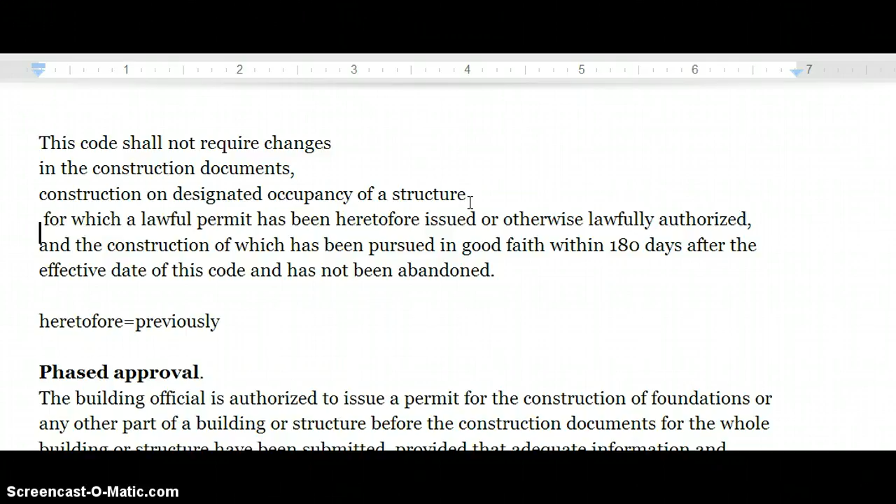This code shall not require changes in the construction documents or construction on a designated occupancy of a structure for which a lawful permit has been issued or otherwise lawfully authorized, and the construction of which has been pursued or started in good faith within 180 days after the effective date of this code.

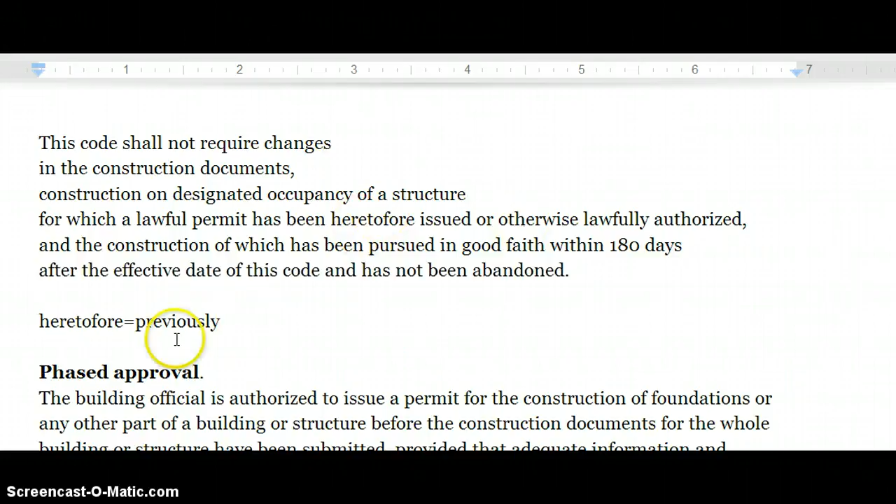Phased approval. The building official is authorized to issue a permit for the construction of foundations or any other part of a building or structure before the construction documents for the whole building or structure have been submitted, provided that adequate information and detailed statements have been filed complying with pertinent requirements of this code.

That means paperwork can be submitted at different times during a large project.

The holder of such permit for the foundation or other parts of the structure shall proceed at the holder's own risk with the building operation.

And without assurance that a permit for the entire structure will be granted. So there is a risk for doing this. You may run into a problem at a later phase of the project, and that is possible.

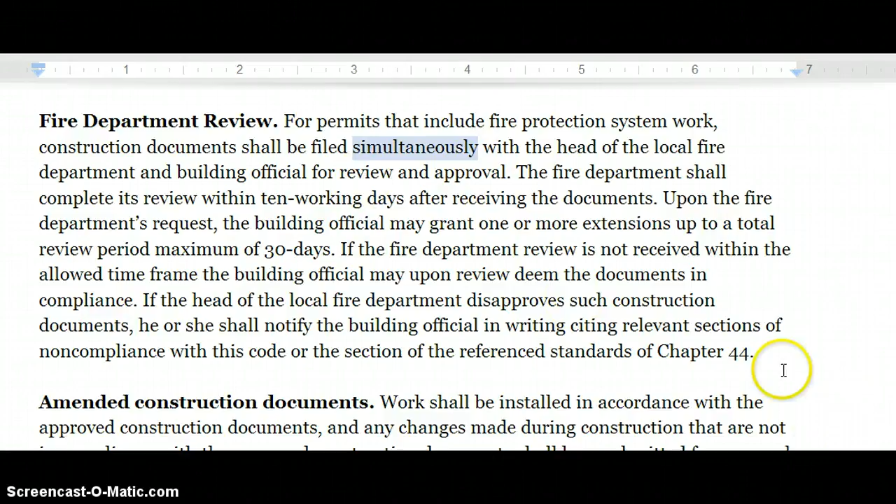First, fire department review. For permits that include fire protection system work, construction documents shall be filed simultaneously - that means at the same time - with the head of the local fire department and building official for review and approval. The fire department shall complete its review within 10 working days.

So this could be a test question. May or may not be.

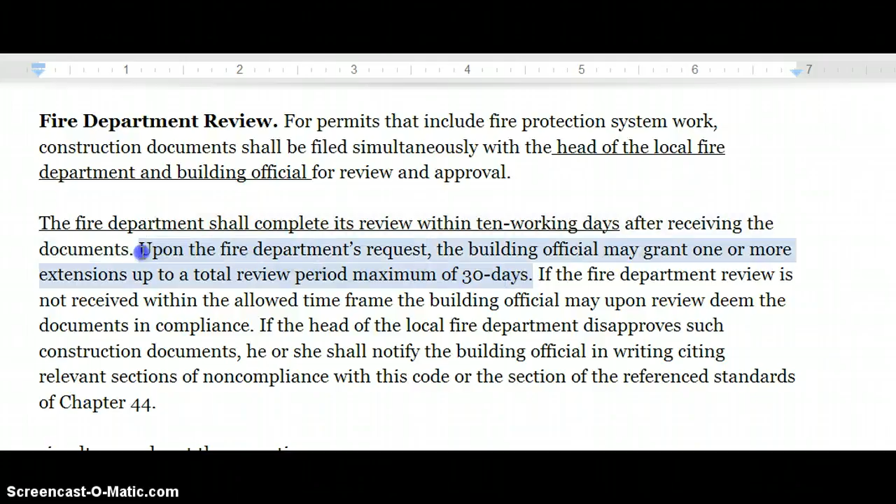After receiving the documents, upon the fire department's request, the building official may grant one or more extensions up to a total review period of maximum 30 days. So the building official can give the fire department an extension for their review that goes from 10 to 30 days.

If the fire department review is not received within the allowed time frame, the building official may, upon review, deem the documents in compliance. So sometimes the fire department just stays quiet and then the building official just approves the permit.

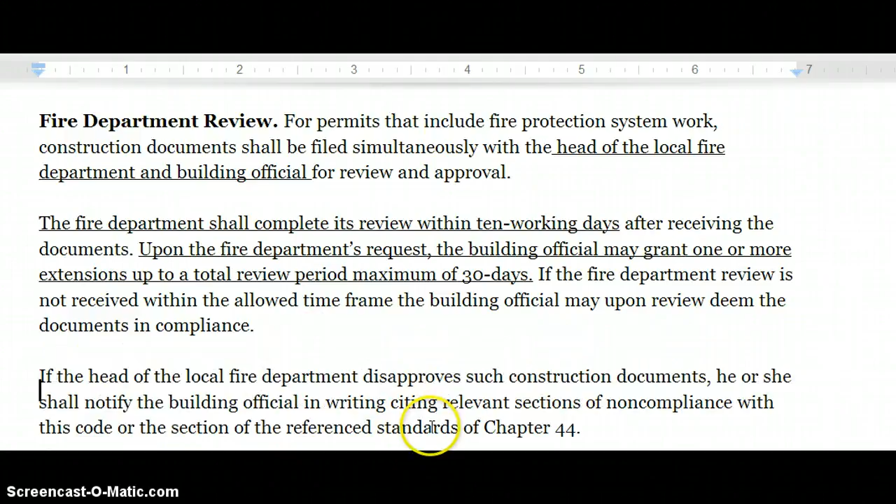If the head of the fire department disapproves such construction documents, he or she must notify the building official in writing, relevant citing - that means pointing out relevant sections of the non-compliance with this code.

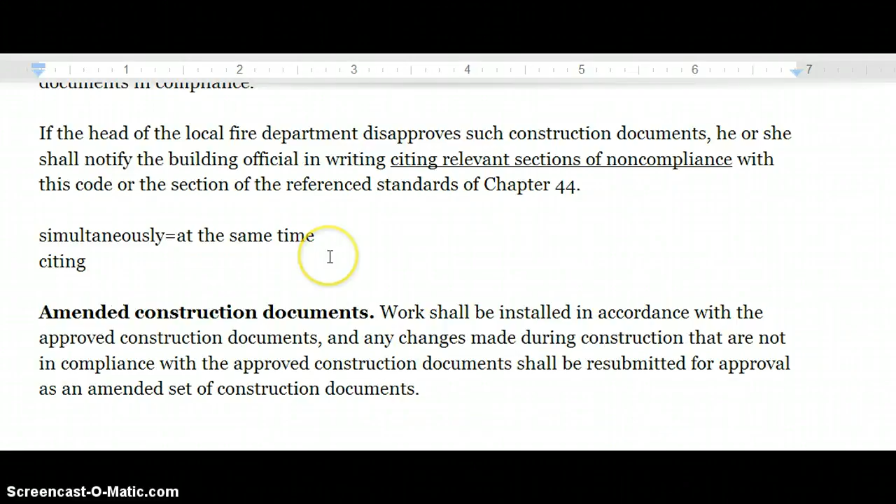So vocabulary: citing equals pointing out, relevant equals important.

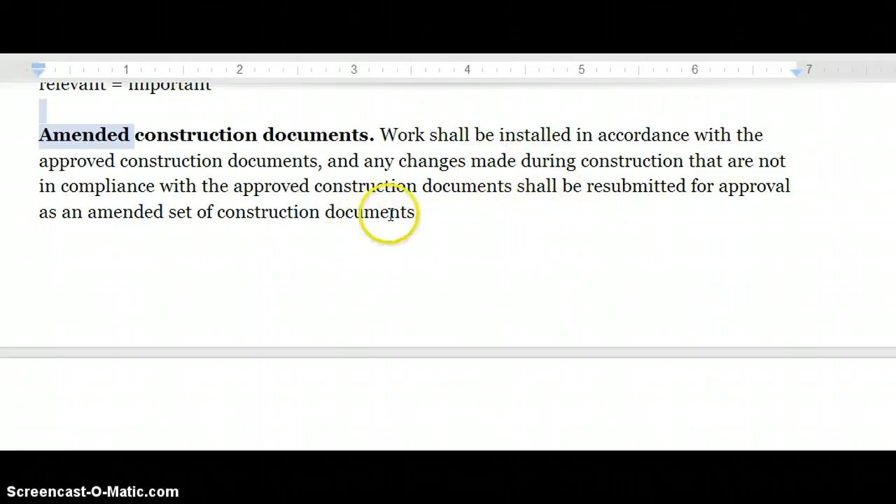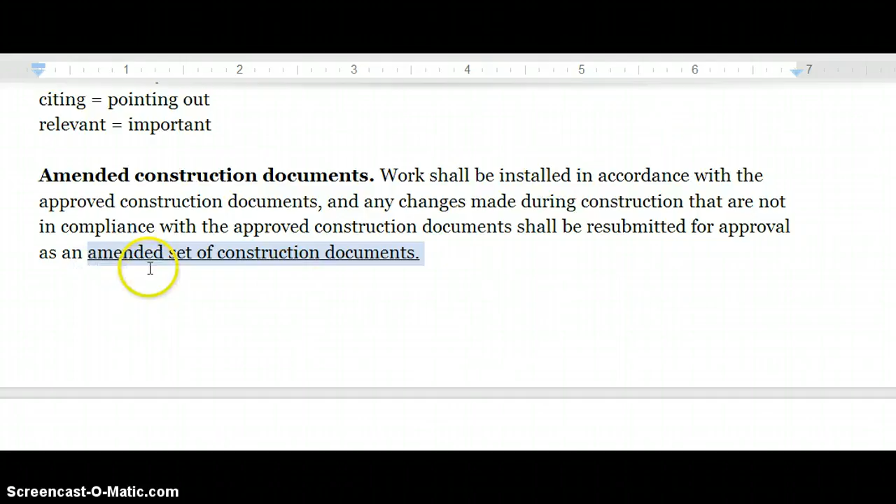Amended construction documents. Amendment means change. Work shall be installed in accordance with the approved construction documents, and any changes made during construction that are not in compliance with approved construction documents shall be resubmitted for approval as an amended set of construction documents. So at times you need to revise the documents and submit them as a set of amended documents.

Retention of construction documents. Sets of construction documents shall be retained by the building official in accordance with the Massachusetts general law.

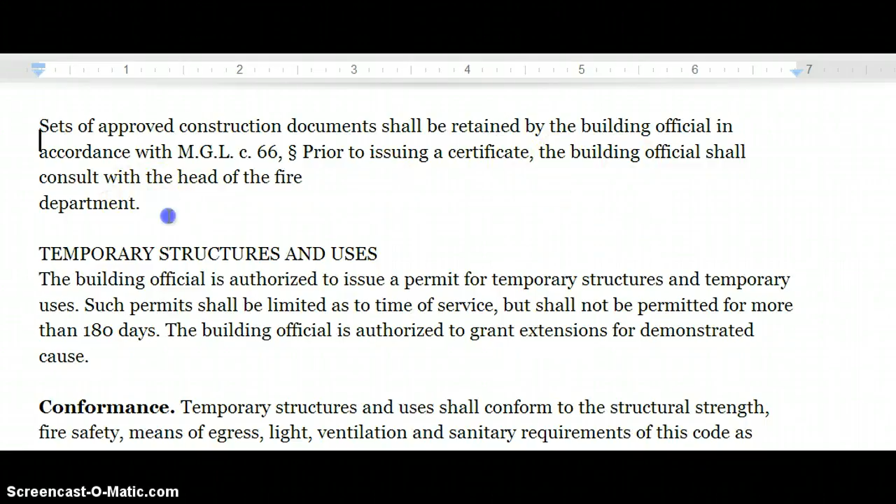Prior to issuing a certificate, the building official shall consult with the head of the fire department. Issuing a certificate - what kind of certificate is this?

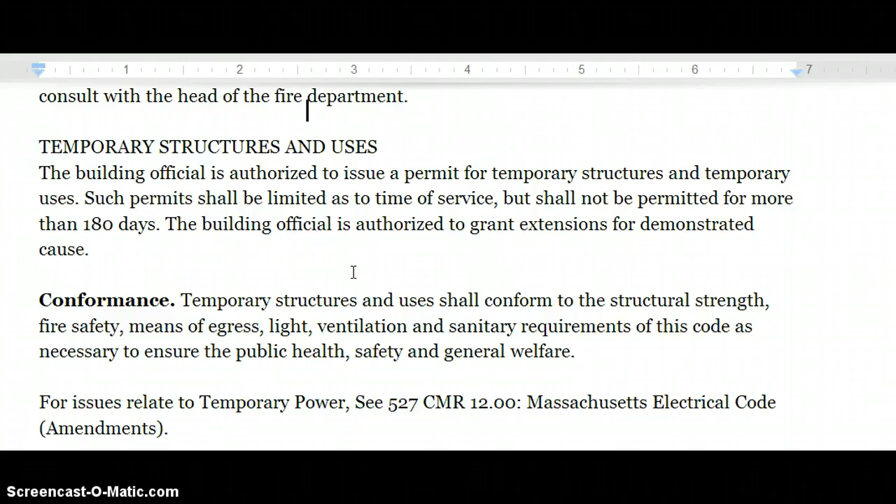Temporary structure and use. The building official is authorized to issue a permit for temporary structures and temporary uses. Such permits shall be limited as to time of service, but shall not be permitted for more than 180 days. The building official is authorized to grant extensions for demonstrated cause.

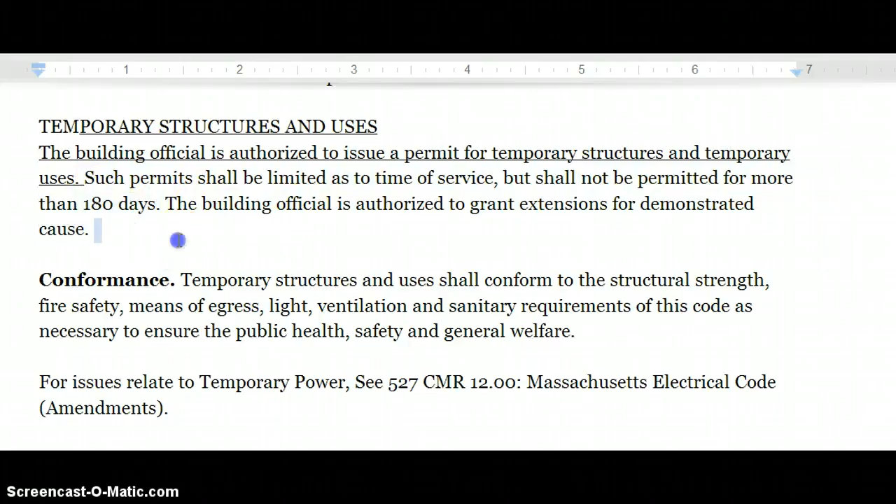So how does this relate to construction sites? But it is also a 6 months temporary use of structures.

Temporary structures and uses shall conform to the structural strength, fire safety, means of egress, light, ventilation, and sanitary requirements of this code as necessary to ensure the public health, safety, and general welfare.

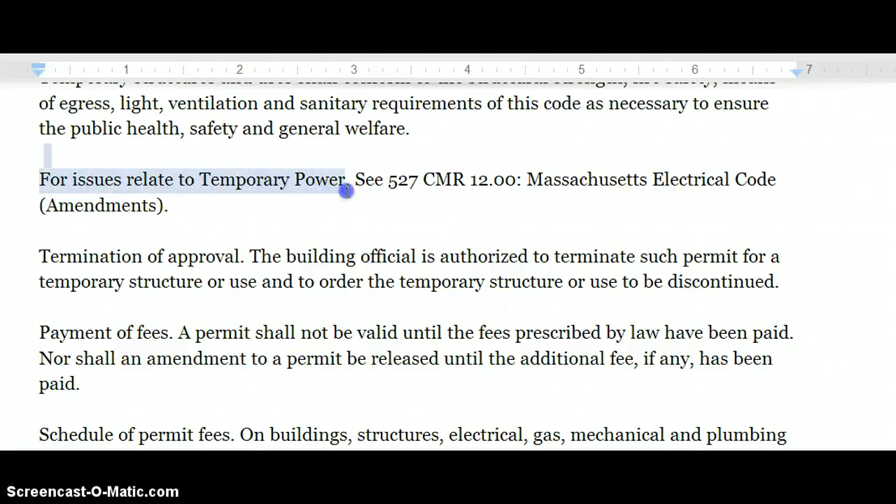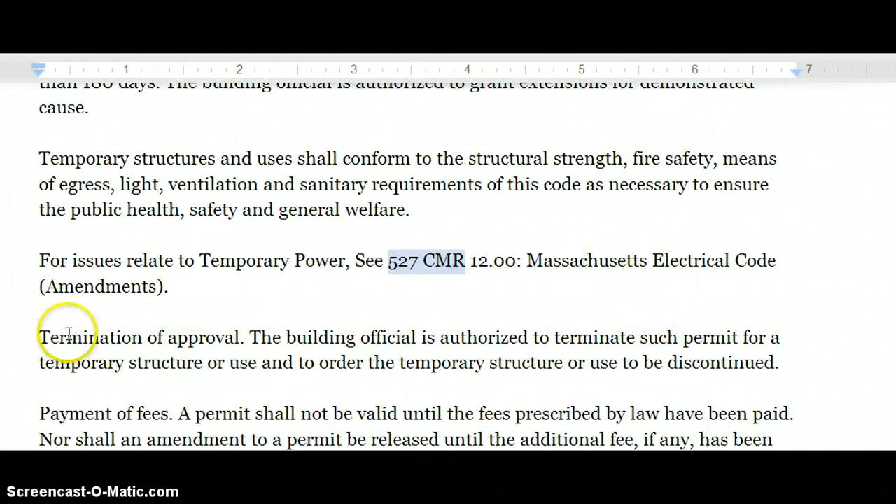An issue related to temporary power that may or may not relate to the temporary structure. The law for that is in the Massachusetts Electrical Code, 527 CMR.

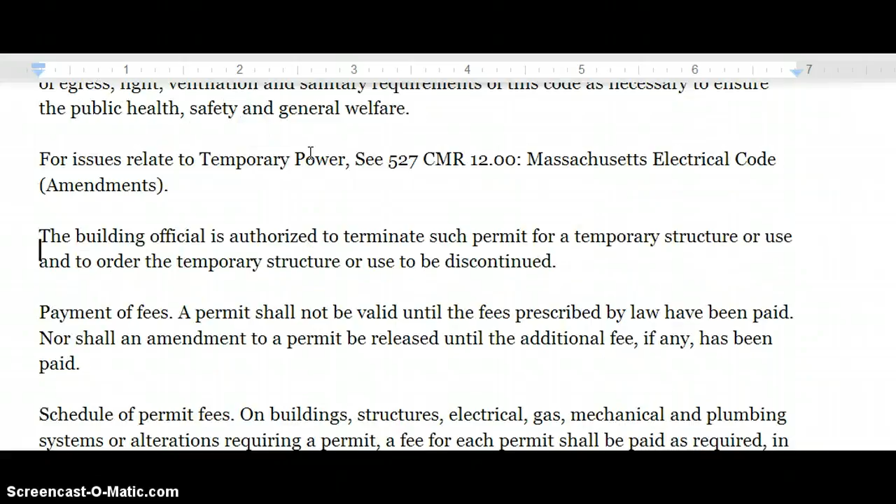Termination of approval. The building official is authorized, meaning the building official can terminate such permit for a temporary structure or use, and order the temporary structure to be discontinued.

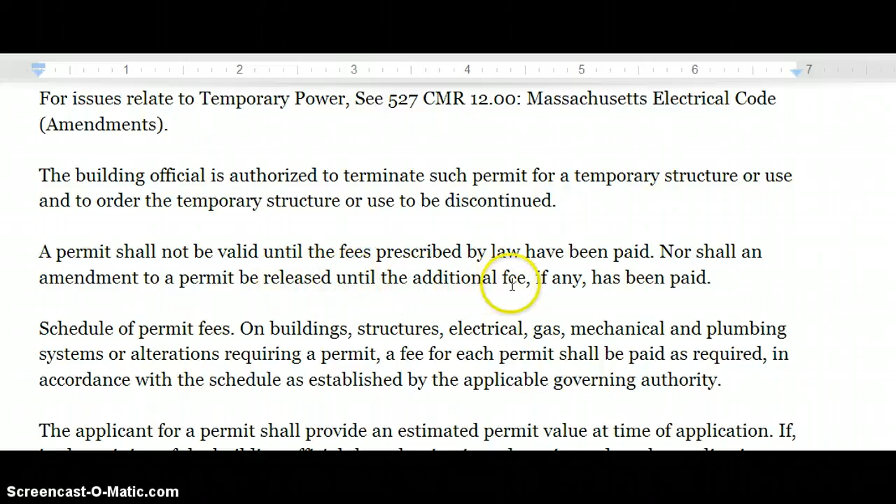Payment of fees. A permit shall not be valid until the fees prescribed by law have been paid, nor shall an amendment to a permit be released until the additional fee, if any, has been paid. So when a permit is being amended, the fee must be paid for the final permit to be valid.

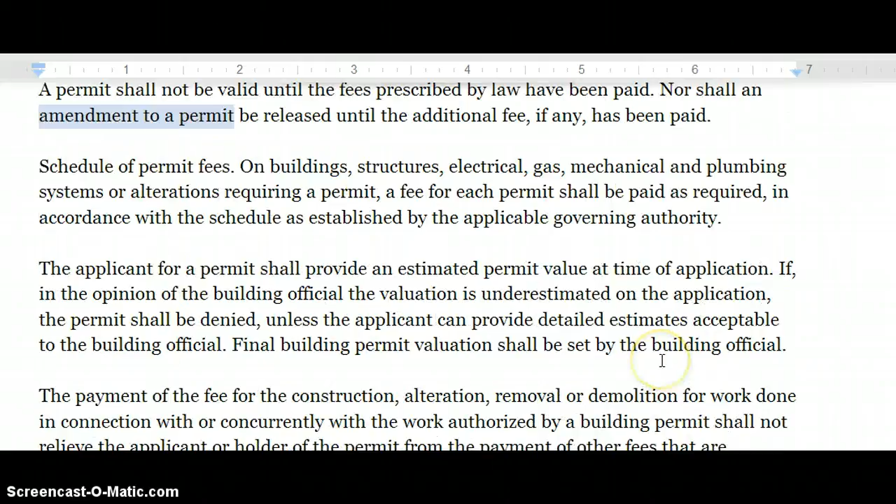Schedule of permit fees. On buildings, structures, electrical, gas, mechanical, and plumbing systems or alterations requiring a permit, a fee for each permit shall be paid as required.

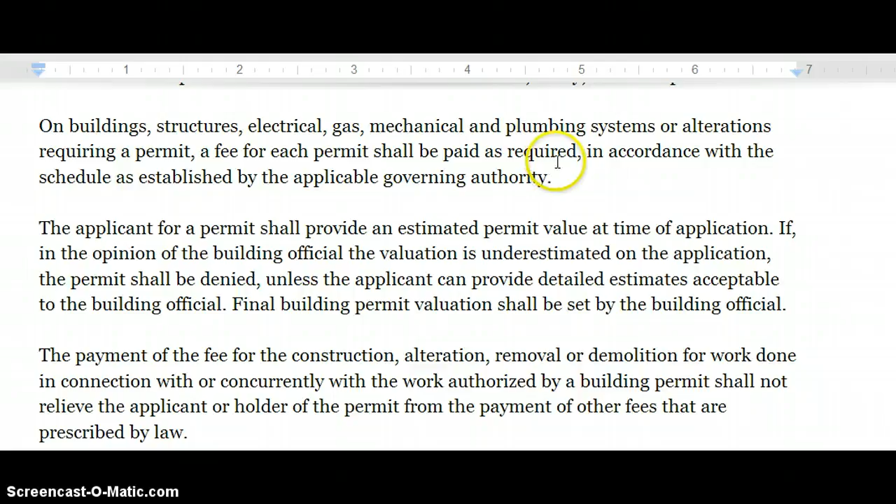The applicant for a permit shall provide an estimated permit value at time of application. If in the opinion of the building official the valuation is underestimated on the application, the permit shall be denied unless the applicant can provide detailed estimates acceptable to the building official.

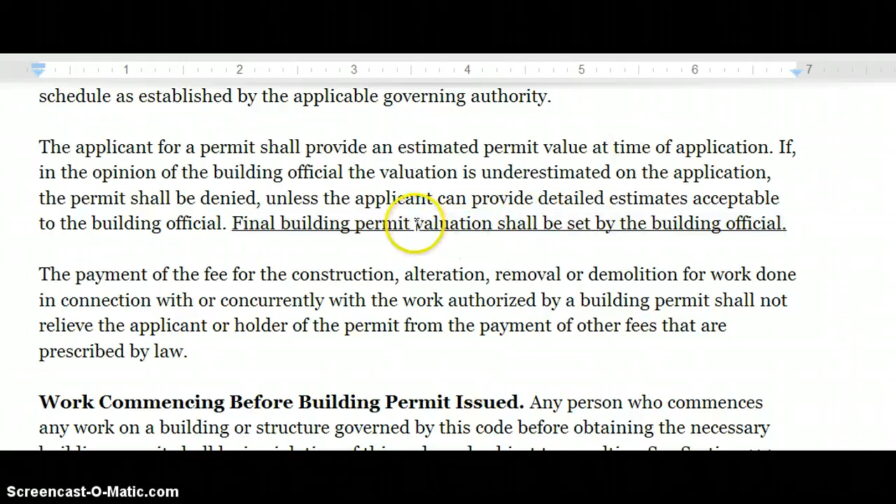Final building permit valuation shall be set by the building official. So the valuation or the cost of the project will be determined by the building official unless you have proof otherwise, and the permit can be denied if there is a disagreement.

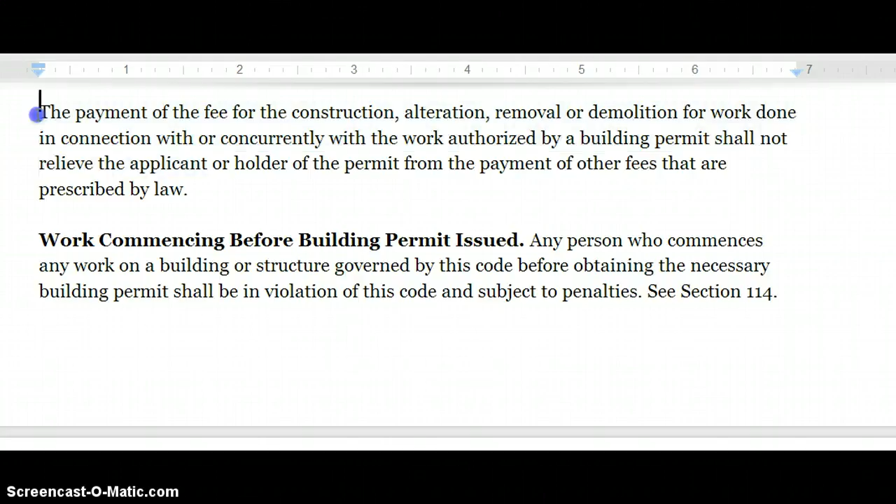The payment of a fee for the construction, alteration, removal, or demolition for work done in connection with or concurrently with the work authorized by a building permit shall not relieve the applicant or holder of the permit from paying other fees that are prescribed by law. So no matter what else the applicant has to pay, he or she must pay the fee as required.

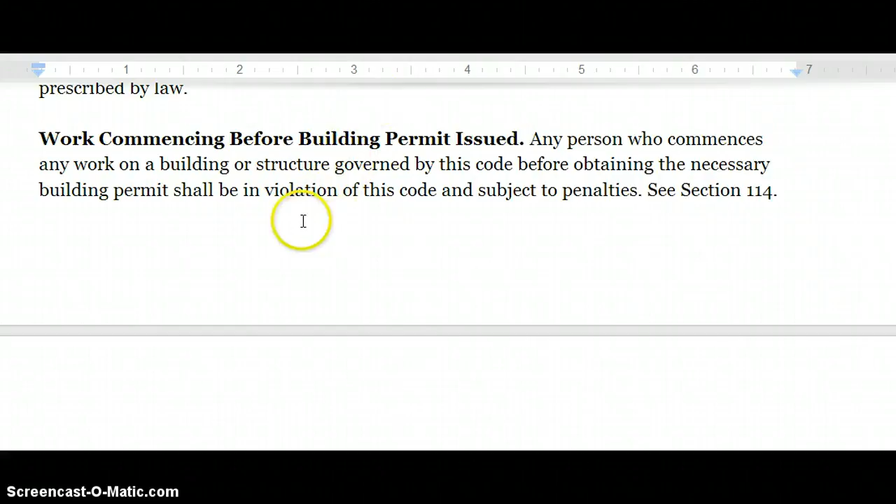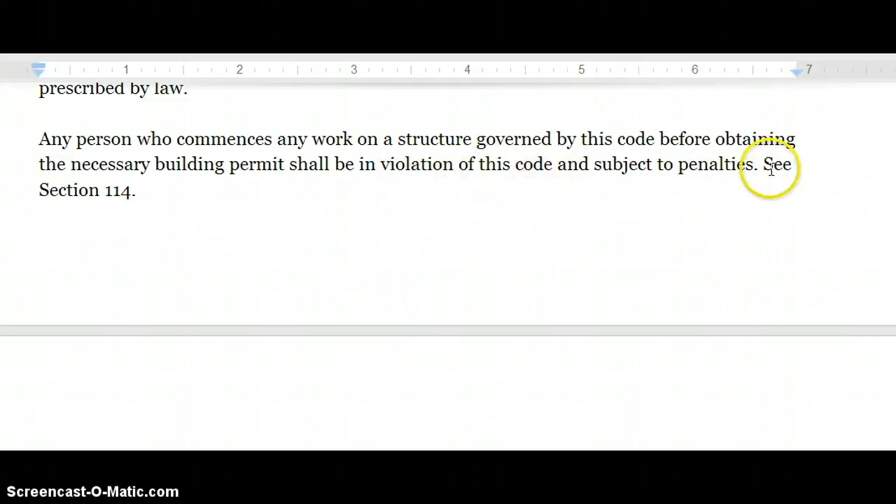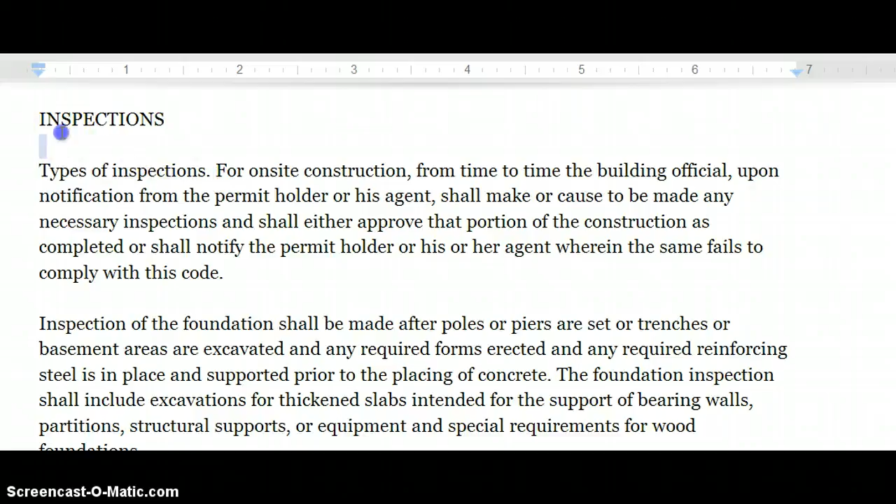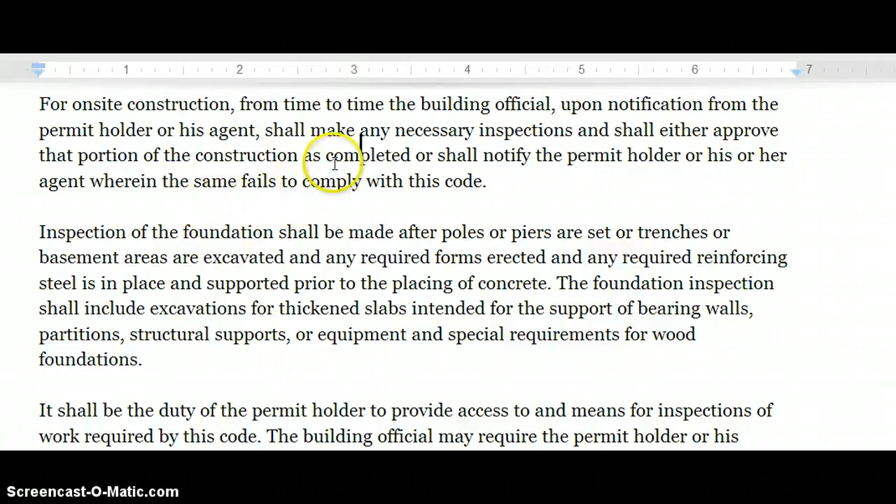Types of inspections. For on-site construction, from time to time, the building official, upon notification from the permit holder or his agent, shall make or cause to be made any necessary inspections, and shall either approve that portion of the construction as completed or notify the permit holder or his or her agent wherein the same fails to comply with this code.

Inspection of the foundation shall be made after poles or piers are set, or trenches or basement areas are excavated, and any required forms erected and any required reinforcing steel is in place and supported, prior to placing the concrete.

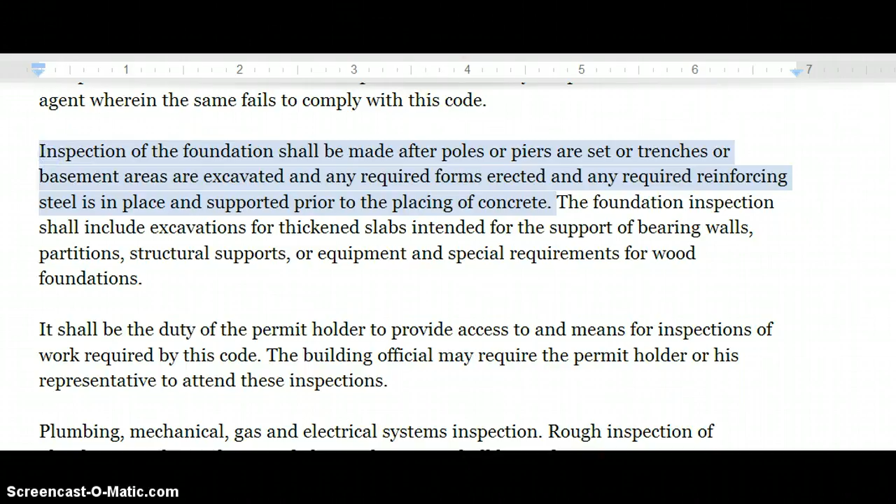The foundation inspections shall include excavations for thickened slabs intended for the support of bearing walls, partitions, structural supports, or equipment, and special requirements for wood foundations.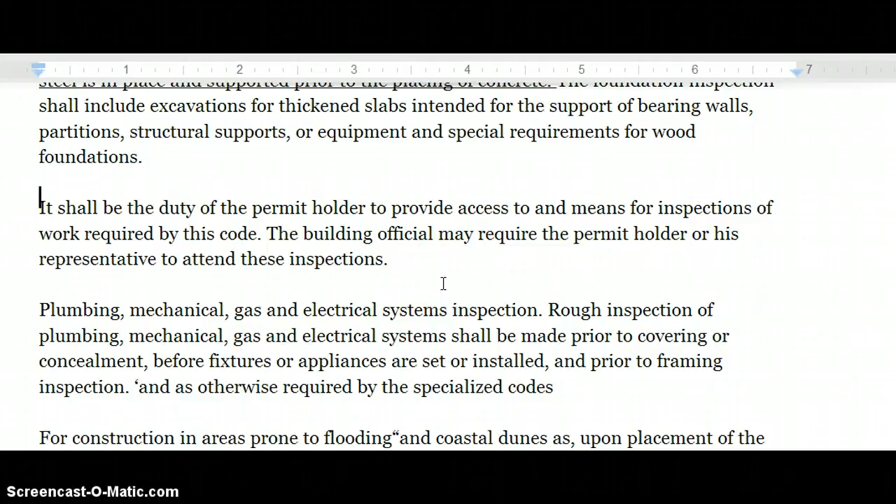It shall be the duty of the permit holder to provide access to and means for inspection of work required by this code. The building official may require the permit holder or his representative to attend these inspections. So sometimes you need to be there.

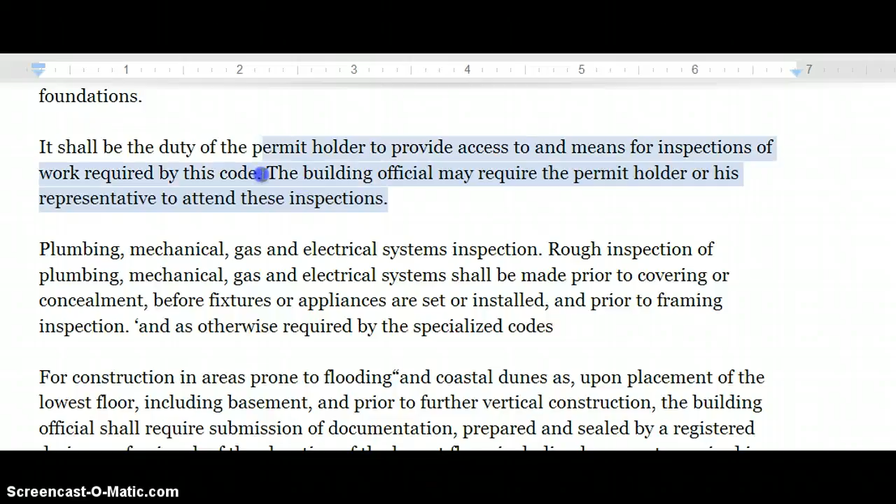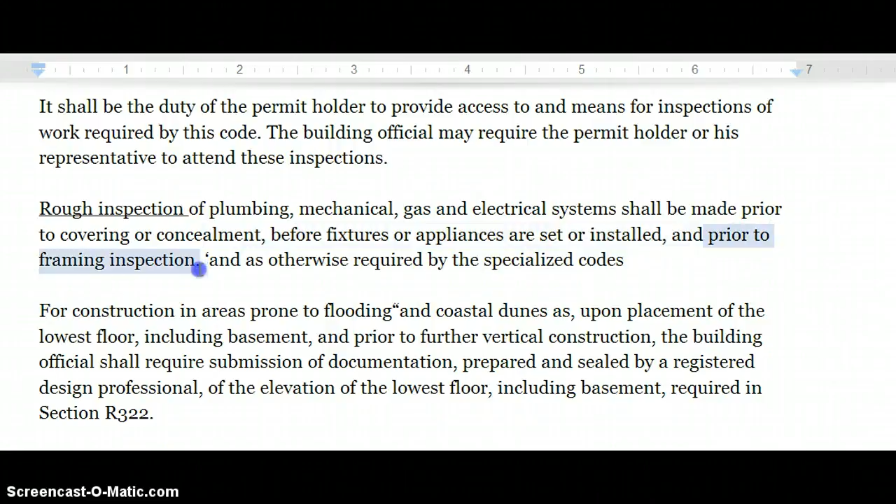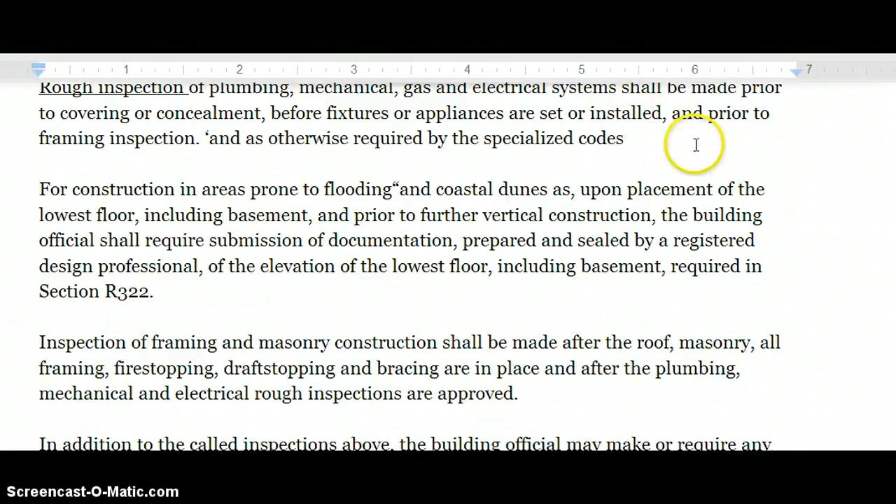Plumbing, mechanical, gas, and electrical system inspections. Rough inspection of plumbing, mechanical, gas, and electrical systems shall be made prior to covering or concealment, before fixtures or appliances are set or installed, and prior to framing inspection, and as otherwise required by the specialized codes. So even before framing construction, the rough inspection of other systems must be approved prior to frame inspection.

That's the code. For construction in areas prone to flooding and coastal dunes, upon placement of the lowest floor, including basement, and prior to further vertical construction, the building official shall require submission of documentation prepared and sealed by a registered design professional of the elevation of the lowest floor, including basement.

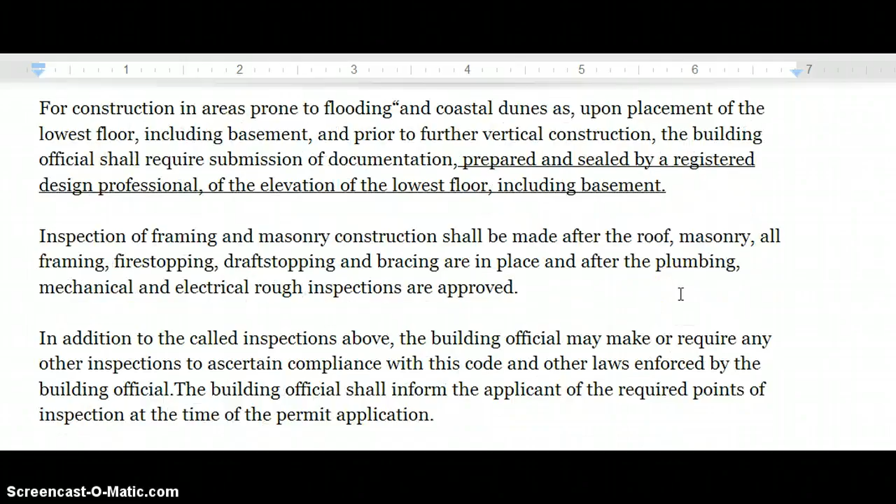Inspection of framing and masonry construction shall be made after the roof, masonry, and all framing, fire stopping, draftstopping, and bracing are in place, and after the plumbing, mechanical, and electrical rough inspections are approved.

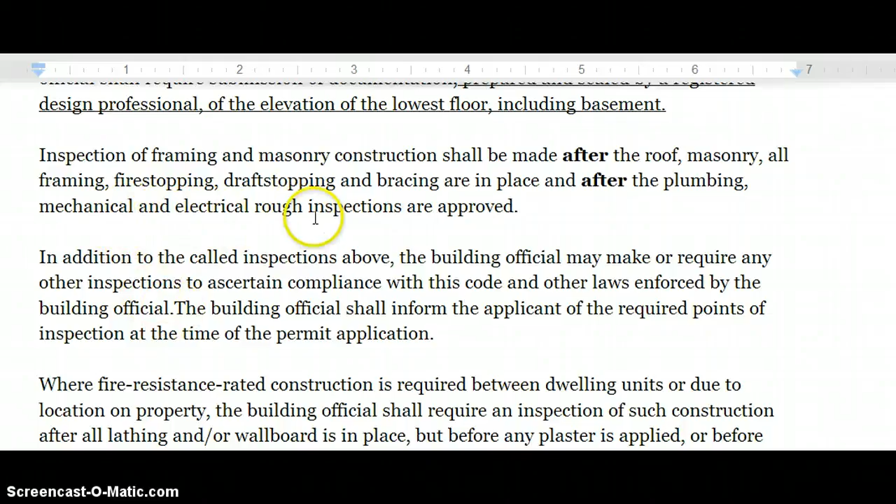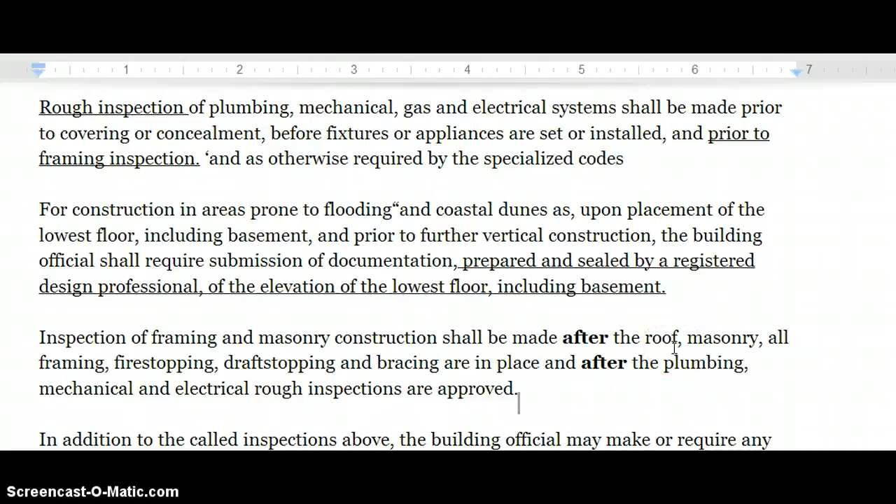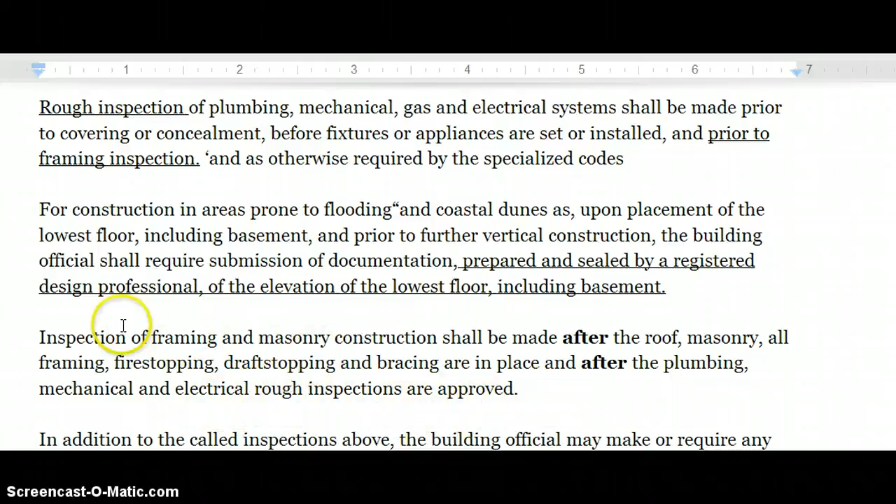So rough plumbing, mechanical, and electrical rough inspection, and then framing inspection. Inspection of framing and masonry construction is done after the roof, masonry, all framing, fire stopping, draftstopping, and bracing are in place, and after plumbing, mechanical, and electrical rough inspections are approved.